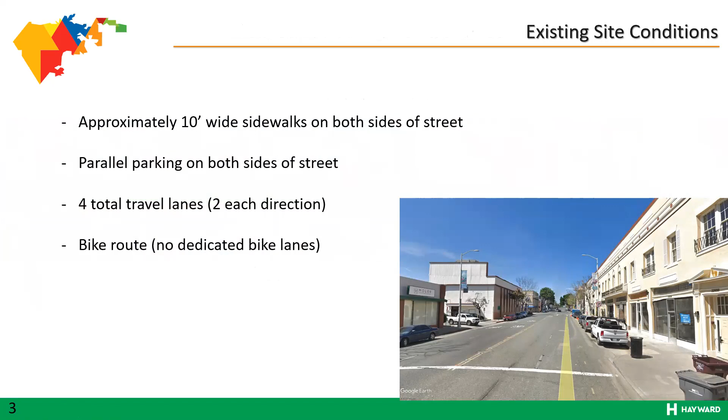For concept C1, the key improvements are placement of a 5-foot, let me turn on my pointer. Key improvements are a 5-foot bike lane between the new sidewalk and a 2-foot median buffer. So it's almost like a protected bike lane scenario.

Before you move on, Alex, can you mention approximately how wide is the existing sidewalk and what is the width of this new one, which is 15, I can see. Yes, so the existing sidewalk is about 9.5 to 10 feet wide here. Let me zoom in. So the existing sidewalk is about 10 feet, and this proposed concept C1 will increase the sidewalk about 5 feet.

So the second concept plan C2, this is another cross section. The difference between this concept and concept C1 is that the bike lane is on the outside of the parking stall, and there is no 2-foot median buffer.

So you have the sidewalk, which is a little bit wider, 17 feet compared to the existing 10 feet. And then you have the 7-foot wide parking stalls, 5-foot bike lane, and then the travel lane. And it's just a mirror image on the other side. Then again, the 17-foot wide sidewalk provides a lot of potential for outdoor seating.

And this is, again, a detailed plan view of concept C2, similar to what you saw earlier. And this information is in just a table format. And the same improvements apply from C1 to C2 as far as the bulb outs, the improvements to lighting, and whatnot.

So the only real difference you'll see is the location of the bike lane relative to the street. As you can see here, it's between the parking and the travel lane, versus in concept C1, the bike lane is buffered between a 2-foot median buffer and the sidewalk. So the landscape buffer is gone, and the 2-foot width has been added to the sidewalk and increased it from 15 to 17 feet. Correct. Okay.

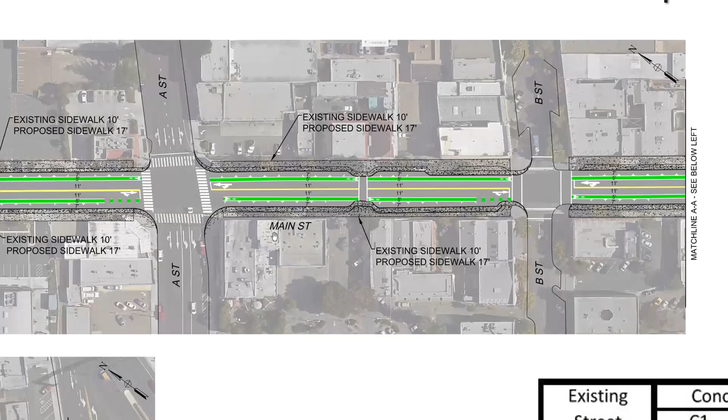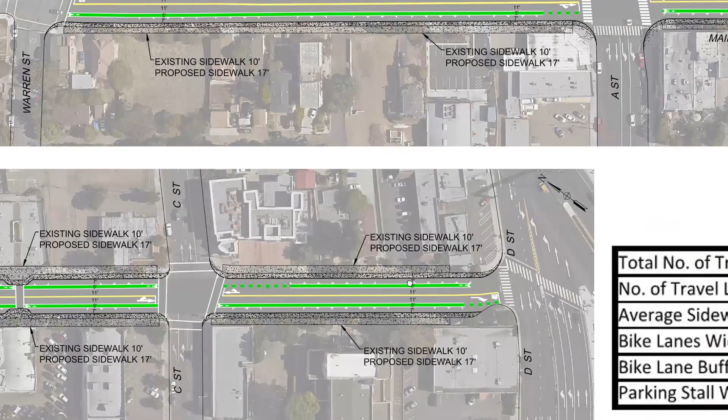Okay, I have a question from Tom Bridge asking, why does the bike lane veer at the crosswalks? Is there an obstruction that forces this? Alex, can you take that? Yeah. So let's see. When you say veers, I'm not quite sure. Is there a specific location that he's asking about? For this concept two, it's pretty straight throughout. The only place where it veers is where we have a curb bulb out there. Yeah, unfortunately, he doesn't mention location, but Tom Bridge, if you want to.

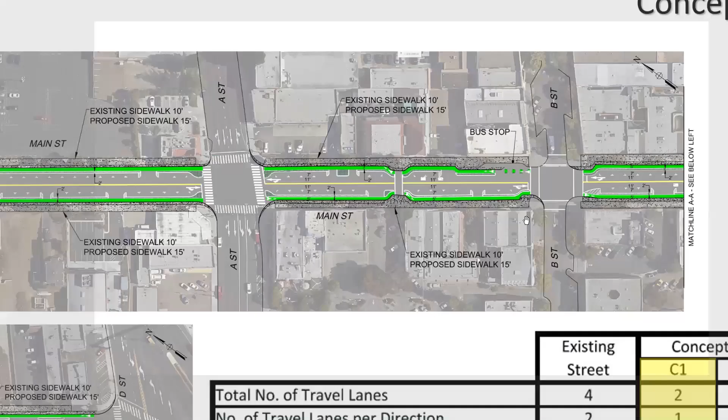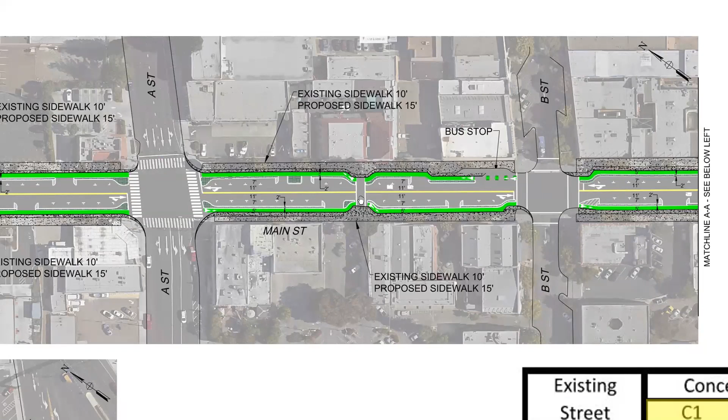Go to concept 1, Alex. Go back. Yeah, you see at the crosswalks, the bike lane comes in. That's what he's referring to. I gotcha. Yeah, so these bulb outs, basically the idea is to shorten the crosswalk distance from one side to the other. With a shorter crosswalk distance, you increase the safety of the pedestrian coming through this crosswalk area. So that's the idea, to make it safer for pedestrians and whoever's crossing this area to get through.

I see Tom Bridge has his hand raised, so I'm going to allow him to talk. Maybe he can specify more on his question. Go ahead, Tom. Tom, you might need to unmute your phone. There you go. Can you hear me now? Yes. Okay, thank you.

Yes, that answered my question. So that was kind of an engineering question I was curious about from Alex's presentation, but listening to some of the other questions and call-ins, it occurs to me that this is like a 4 or 5 block stretch in downtown, and the underlying reason is we're really trying to get more pedestrian traffic into downtown. Correct. And on this relatively short stretch of road, most of the people calling in, and I appreciate it, are bicycle oriented, but if the object is to get people to come downtown and walk around, the C2 pedestrian option looks better to me.

After all, with C1, with the safer bike lanes, which I agree with, we're only creating like 4 or 5 blocks of safer bike lane throughout the East Bay. That doesn't seem like that much to me, really, as opposed to trying to get more people to come walk around downtown Hayward. Okay. So you're in favor of concept number 2 because it has wider sidewalks. Yes. Okay.

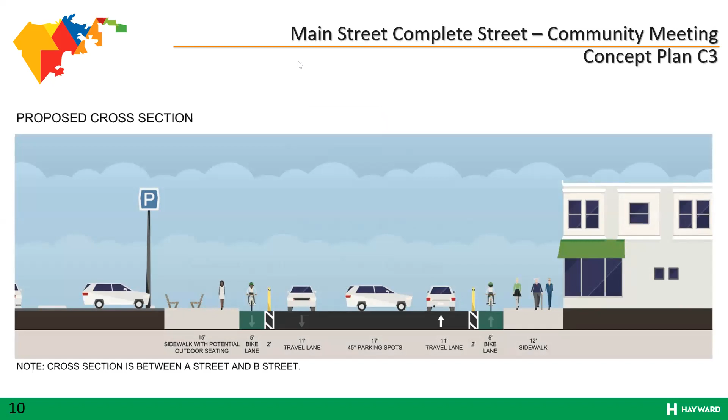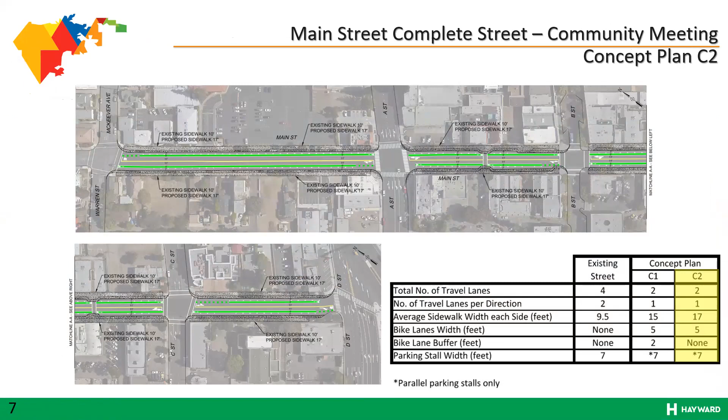Alex, do you have the information? We're anticipating the project to start in the spring of 2022, and it'll probably take about 8 or 9 months to construct. Right, so we are in, okay, so you have the... Oh, excuse me, it starts in the fall of 2000, oh no, I'm sorry, I was right, sorry.

Right. So we are in the beginning of the design phase. After we go through and get your comments, the design is going to take several months. After that, sometime towards the end of next year, we are going to go to construction. Construction is going to take a year or so. So by the end of 2022, construction should be completed.

Okay, next. We don't have any more hands raised. If you still have a question, please raise your hand. But we do have a few comments on the question and answer board. Bruce says, just to be clear, I favor C1 protected bike lanes with buffer on passenger side rather than buffered bike lanes with buffer on the driver's side. The only way to get interested but concerned cyclists on the road is to protect the cyclists from cars.

Also, Juan Alvarado says, thank you very much for having this meeting and for answering our questions. Reno Sanchez says, if anyone's interested in the San Lorenzo Creekway project, there's a community meeting tomorrow night, and she put the details or a link there. I'm gonna keep that up if anyone's interested. Carl says, my concept for diagonal parking is along the side. I agree that having it in the center of the road is not a good idea.